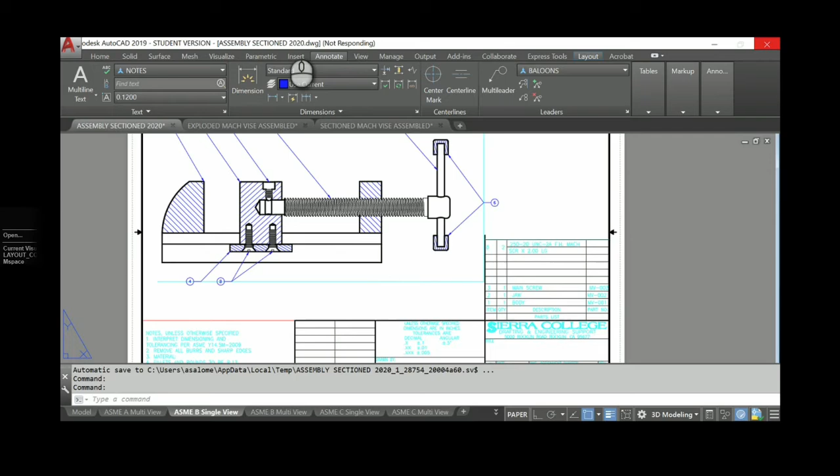So the other thing we're going to do is go back and open the other one that we saved off as the assembly exploded. I'm going to show you how to do an exploded assembly, which is really kind of cool. It's one of my favorite things to do. I really like building exploded assemblies. As you know, that's going to be an isometric view drawing, and it's really kind of cool. So if my computer will actually access my file, here we go. That was the one, what did we call it? Assembly Exploded 2020.

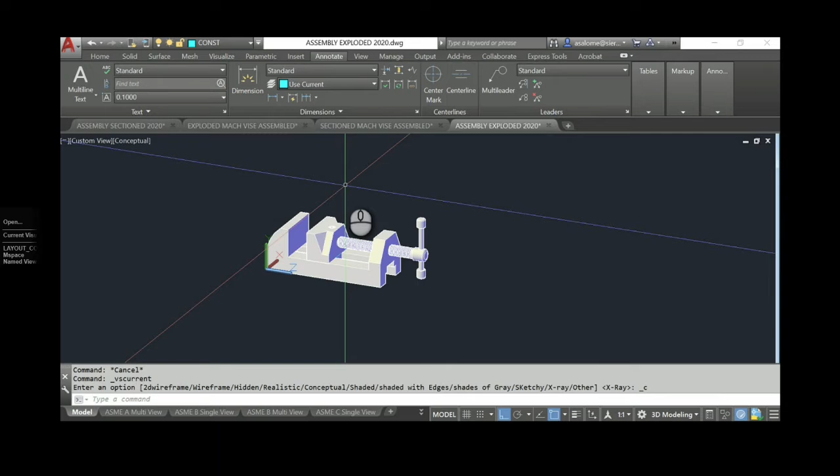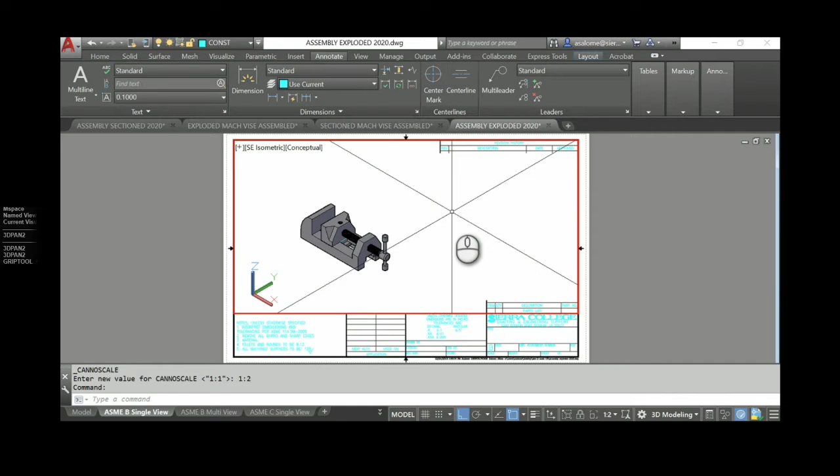Okay, so here's how that's going to look when you open it. It's going to look the same as it did when you left it. What we're going to do with this is I'm going to hop directly to the ASME-B single view layout. On this layout, I'm going to open the viewport and start by going to a Southeast ISO, go to conceptual, and set this up at half scale. Now that's going to feel small, but you do not want it any bigger than that, and you're going to see why in just a minute. I'm going to set this kind of off a little bit to the left and kind of centered, and I'm going to lock the viewport.

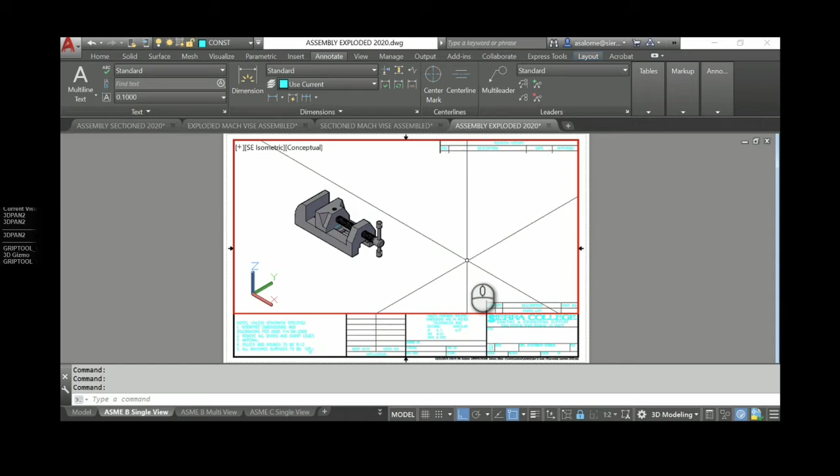Because what you're going to do next is you're going to use your move gizmo to move these parts around. Do not do this in model space. Do not do this except through the viewport at Southeast isometric and locked at your scale. Because what you're going to do next is you're going to start pulling these parts apart, and you need to see how much room you have for them to print on your sheet. So set this up first, lock it down, and then it's this simple.

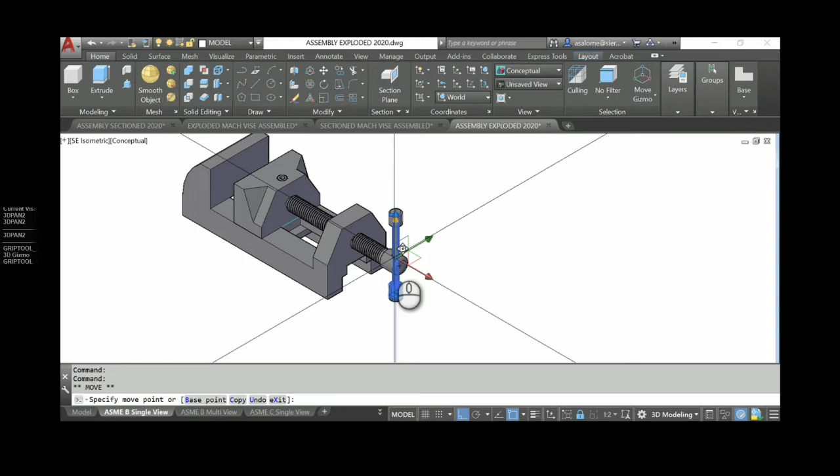We're going to go to our home. Remember, our default gizmo is the move gizmo. So I'm going to begin by selecting the handle, the two caps, and the main screw, and I'm just going to simply use my move gizmo. I'm going to pull this out just until I have space between my components here. Then I'm going to take just the handle and one cap, and pull just until I have some clear space between the components here. And then the cap on its own, just until I have space between them.

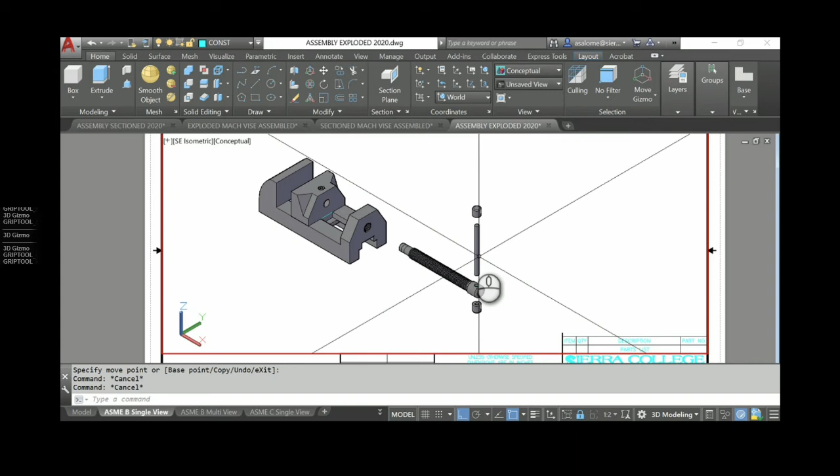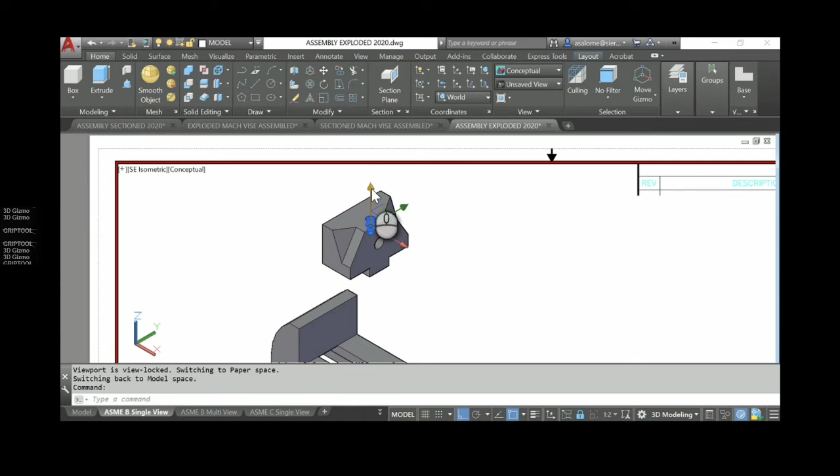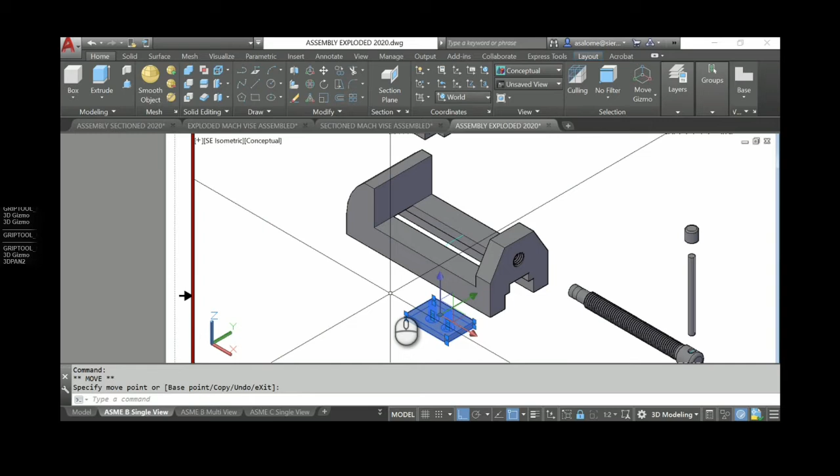Here, I'm going to grab the adjusting, or the little socket head cap screw and the jaw, and pull these just until I have clearance between those and the other part. And then the screw on its own, just until I have room. Now you can see why I used a half scale, because you're going to need this much room to make this work. Then I'm going to take the two flathead screws and the bottom plate together, and move them down just until I have clearance. And then the two screws only, just until they have clearance.

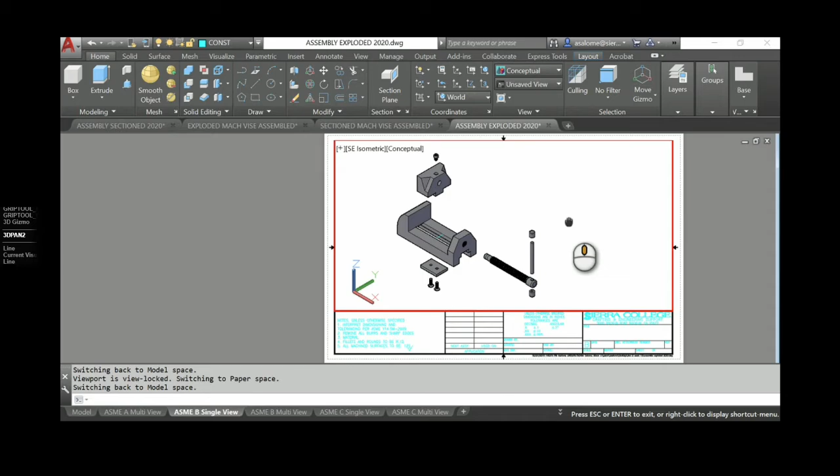Okay, now once you have all of your components separated, you can open this, unlock it, and pan, but you want to stay at 1:2 scale, and you have to stay at a southeast isometric.

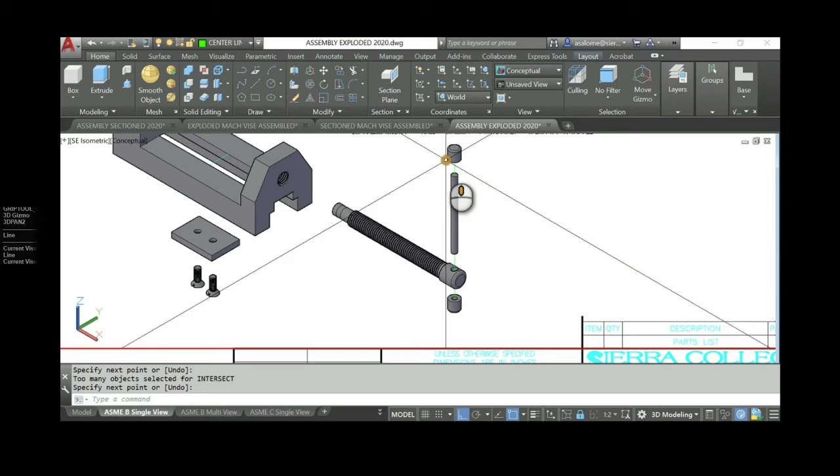Okay, and then we're going to put in part trails, and part trails are nothing more than center lines. I'm going to go to my center line layer, and I'm going to draw the center line from any center down here to any center in there. What that's going to do is show how those components go together. In this case, I am going to go to either a 2D wireframe or to X-ray to put in from the tip here.

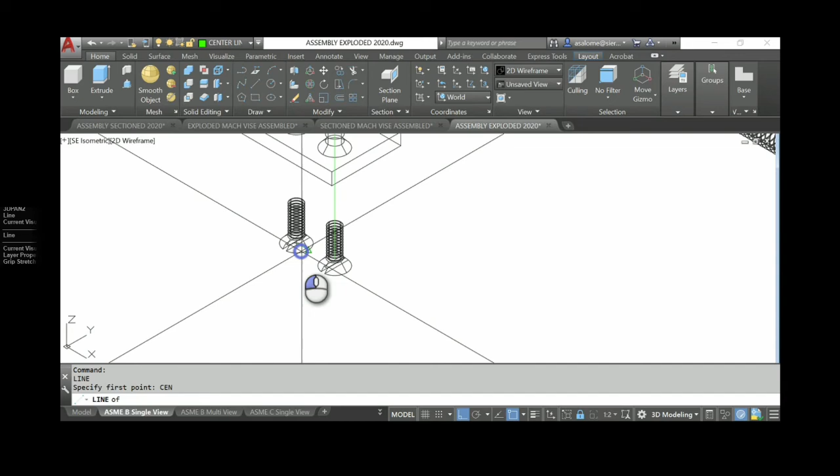To the center, CEN, here. And then I'll go from the CEN here and come back to the tip here. Okay, so you can see how those parts trail and track and go together.

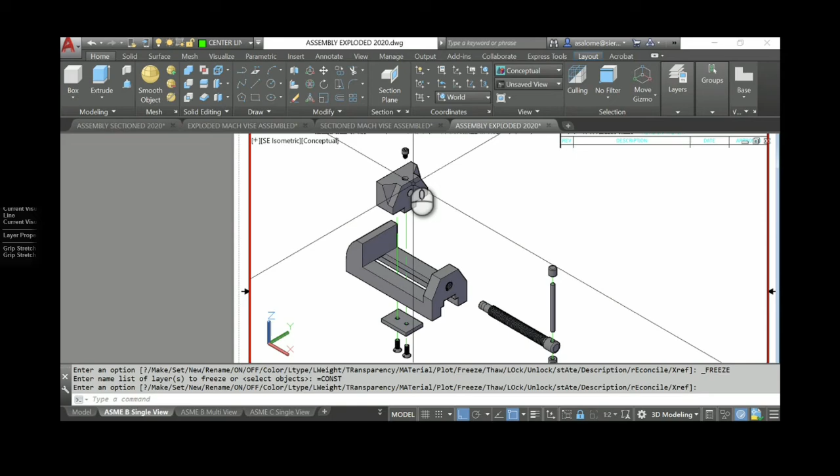I'm going to freeze my construction layer. We don't want to see that. And then same here.

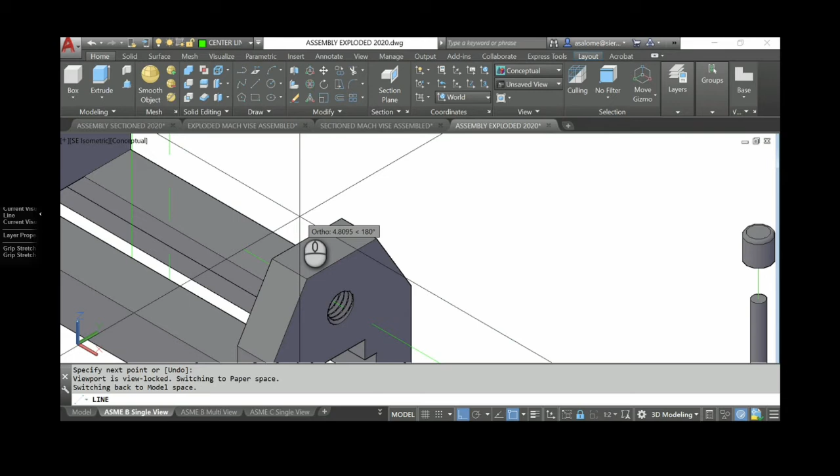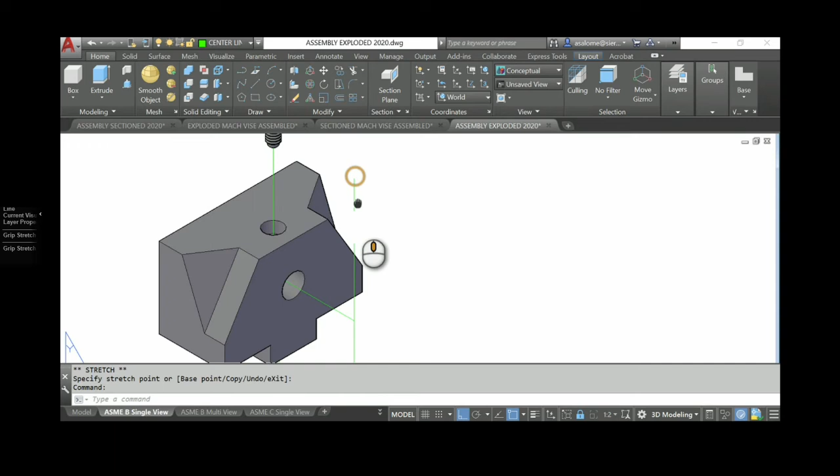Line from any center here into the center there. And then this one, it's going to be a little bit tricky. So this one, I'm going to take a line from the end point there, and I want to come through, and then turn straight up, and I'm going to go up too far. And then I'm going to do a center line from in here, and bring it out. And then I'm going to use my grip editing to pull those to each other. Trim doesn't necessarily work there because I'm not in that plane. Okay, and that shows that this comes through there, and when this falls into place, that's going to go through there.

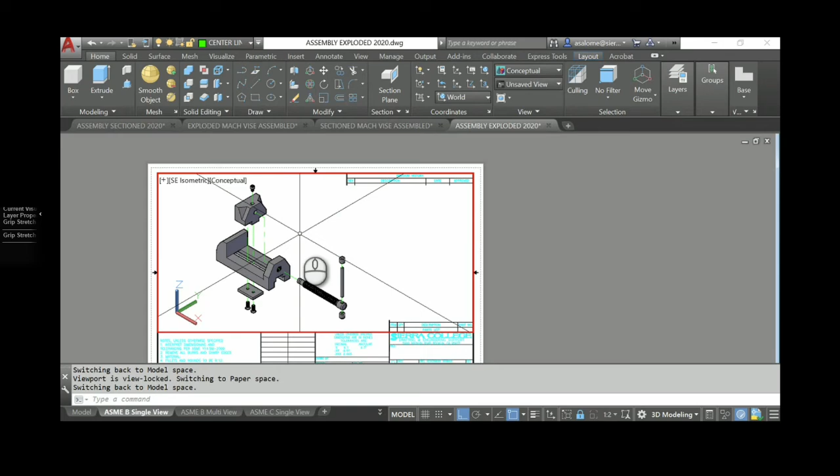Now, this drawing still needs to have balloons and a parts list, and you're going to do that the exact same way that you did on the other one, making sure your balloons are all nice and neatly lined up, and then the parts list is going to be absolutely the same.

Make sure your numbers match.

And then you're going to put all this together because it's due next week. What I would love to see is one PDF file from each team that includes a cover page. That cover page should have everyone's name on it. It should have a table of contents listing what is coming next. It should have all 7 of the detailed part files, the 2 assembly drawings, and a bibliography. So that's what I'm looking for from each team.

As far as the assembly drawings you're going to include, the exploded assembly is a drawing that typically I have you guys build together as one file. But because you guys can't get together in the lab, I think we're going to do the same thing there that we do with the section assembly, and that's this: each individual person builds each assembly drawing and then shares it with the team. The team should decide which is the best exploded assembly and which is the best sectioned assembly, and include the best ones in the project.